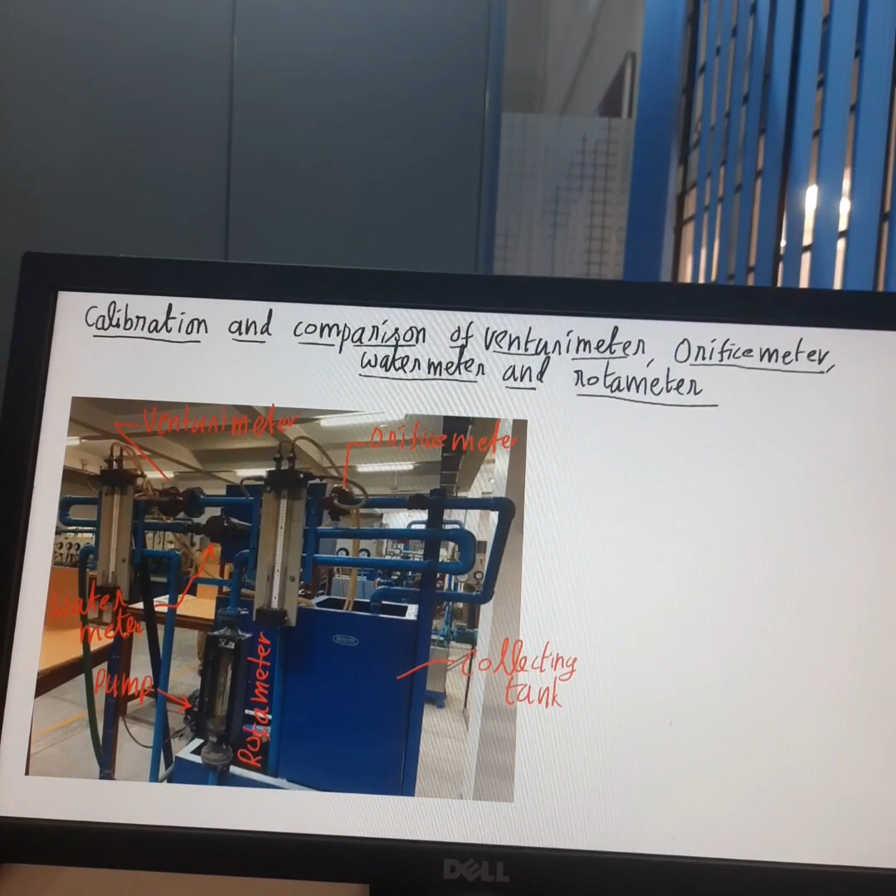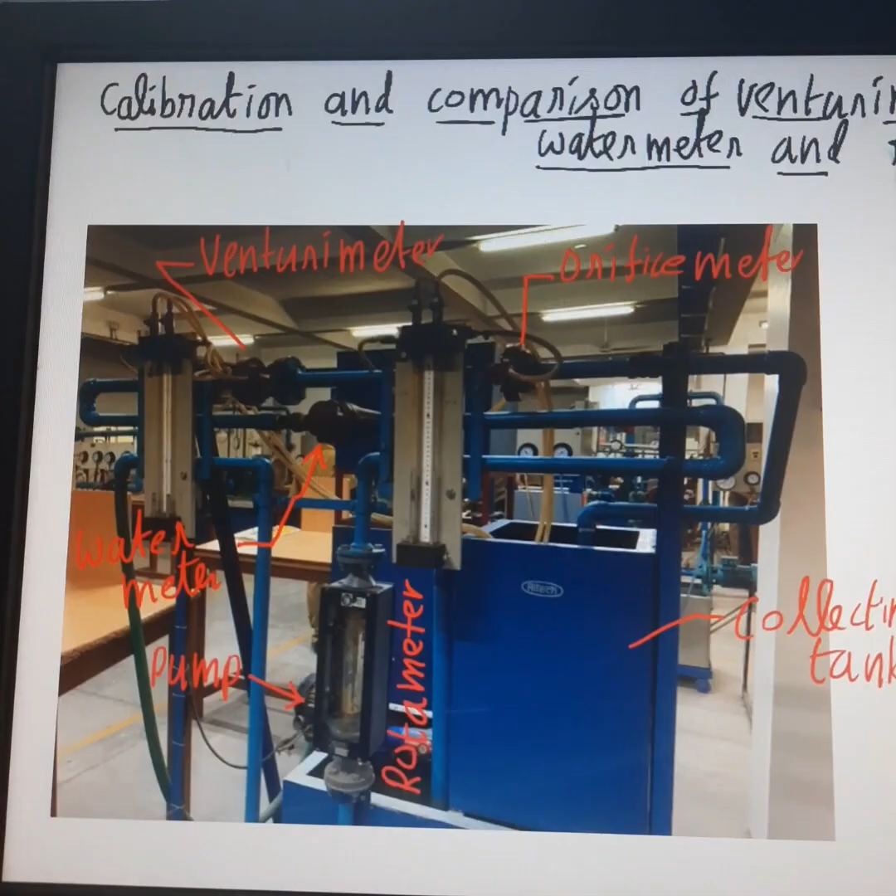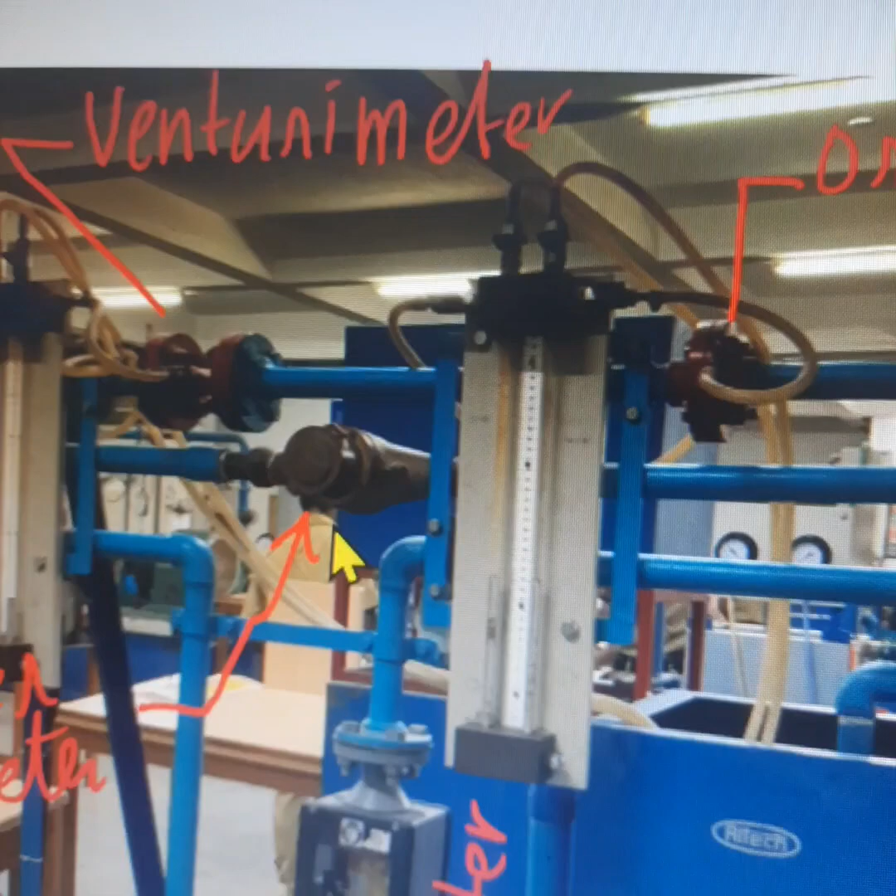This experimental setup contains 4 meters fitted in it: a venturimeter, orifice meter, rotameter, water meter, and a collecting tank is also present here.

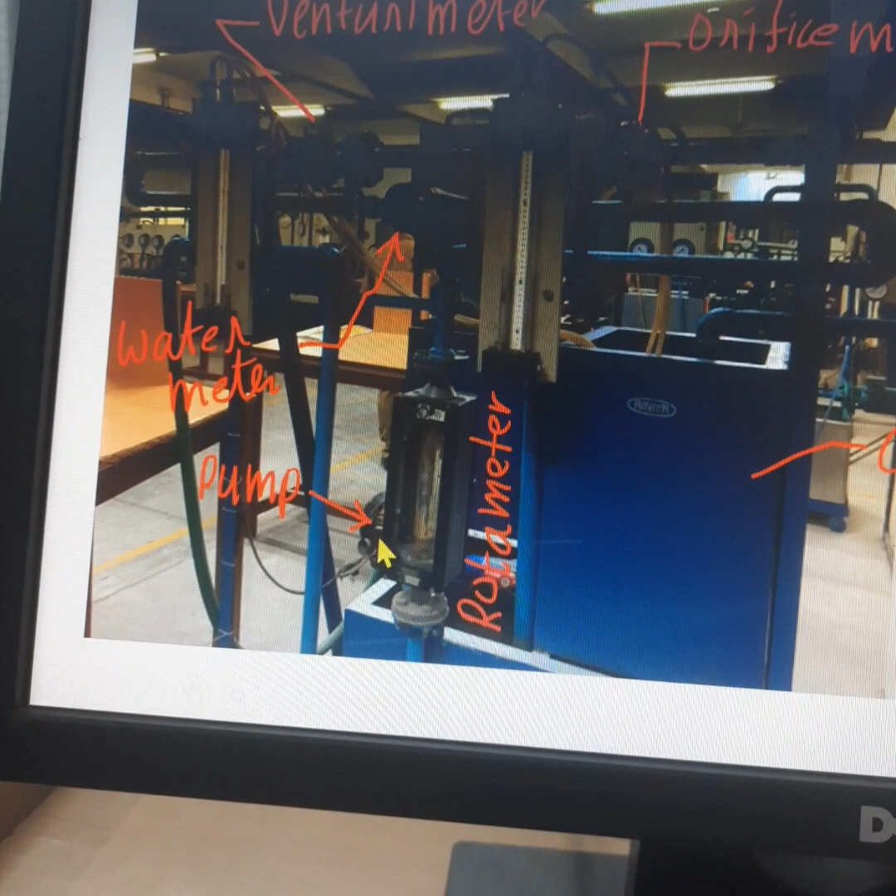There is a pump that supplies water from the sump. The supplied water is flowing through this hose and it flows through all the 4 meters before it is getting collected into the collecting tank.

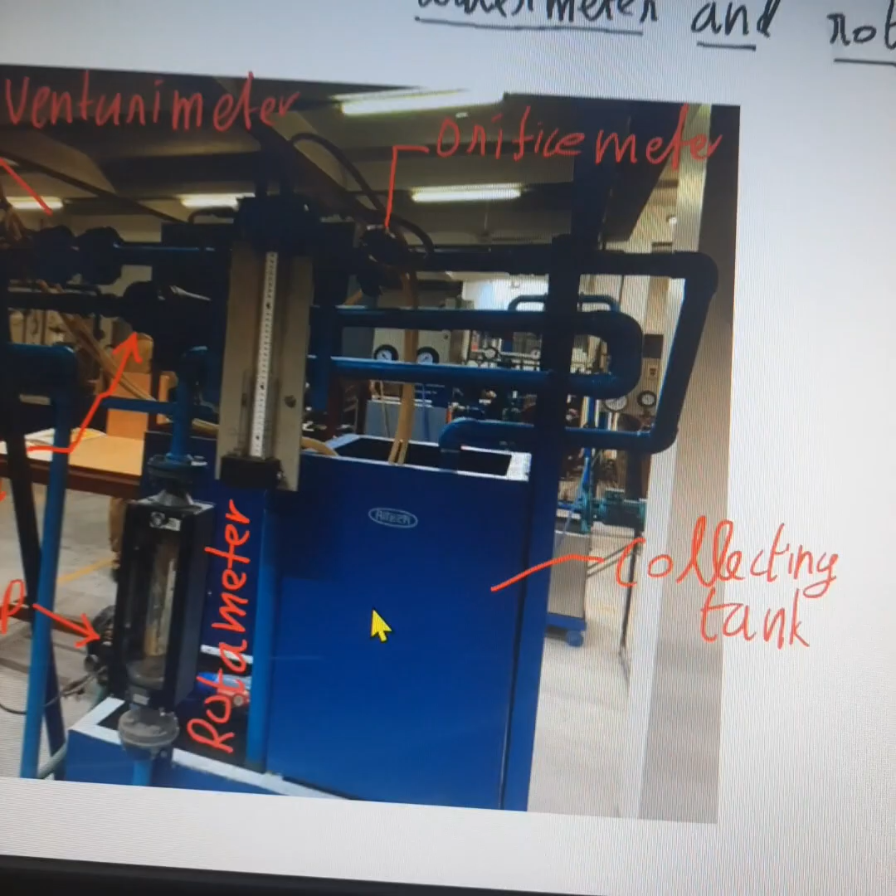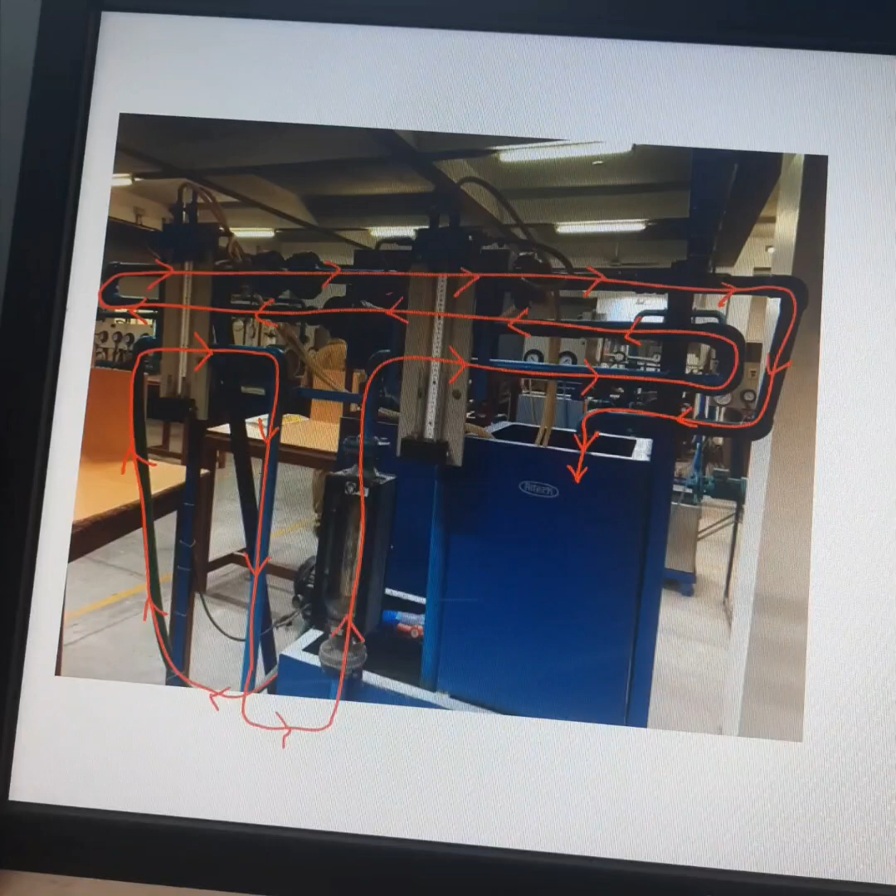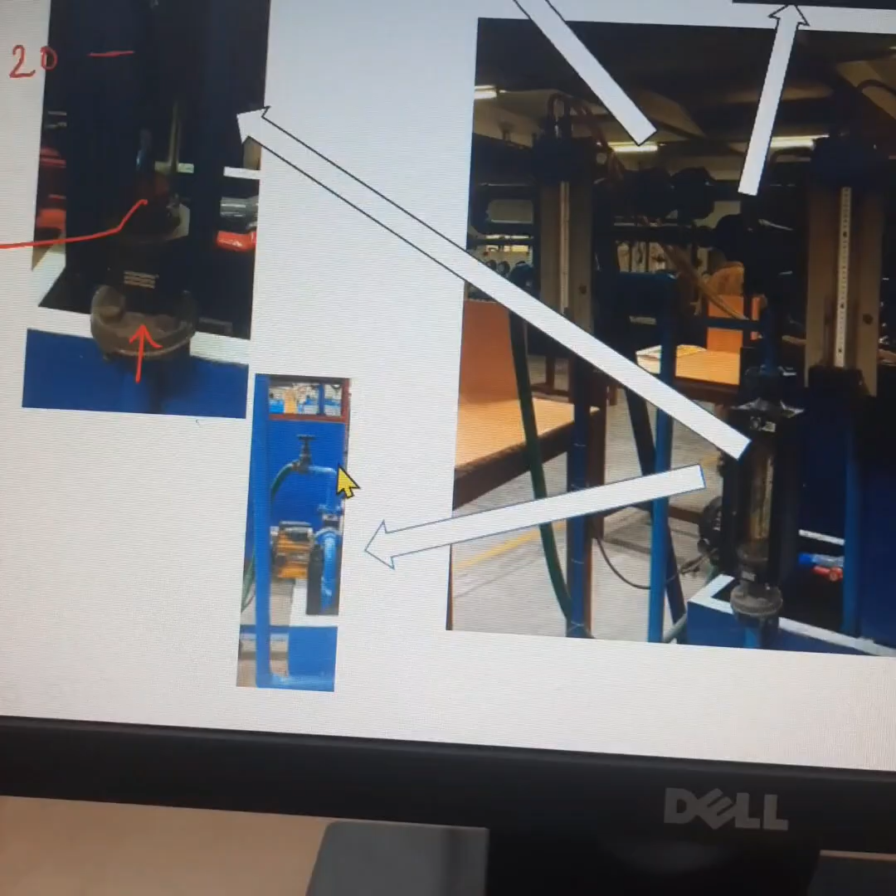This photograph shows the direction of water flowing through all the 4 meters before it is getting collected into the collecting tank. There is a valve fitted at the delivery pipeline of the pump, so we can adjust the valve position to control the discharge of water flowing through these 4 meters. For a given valve position, the rate of flow of water flowing through all the 4 meters will be same.

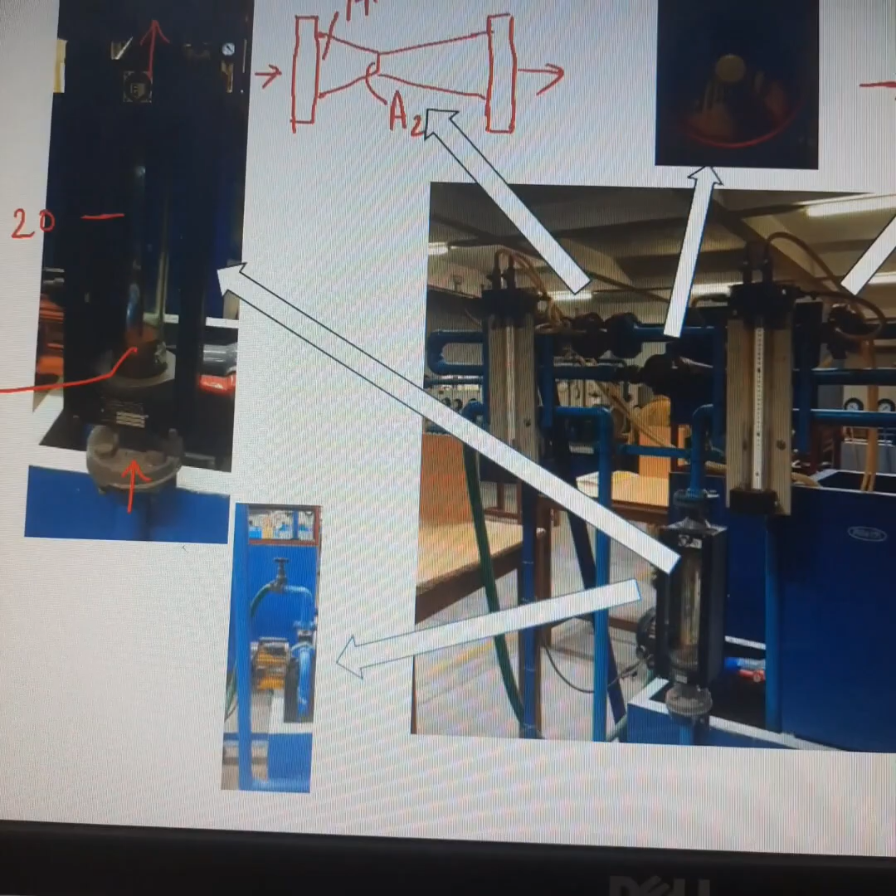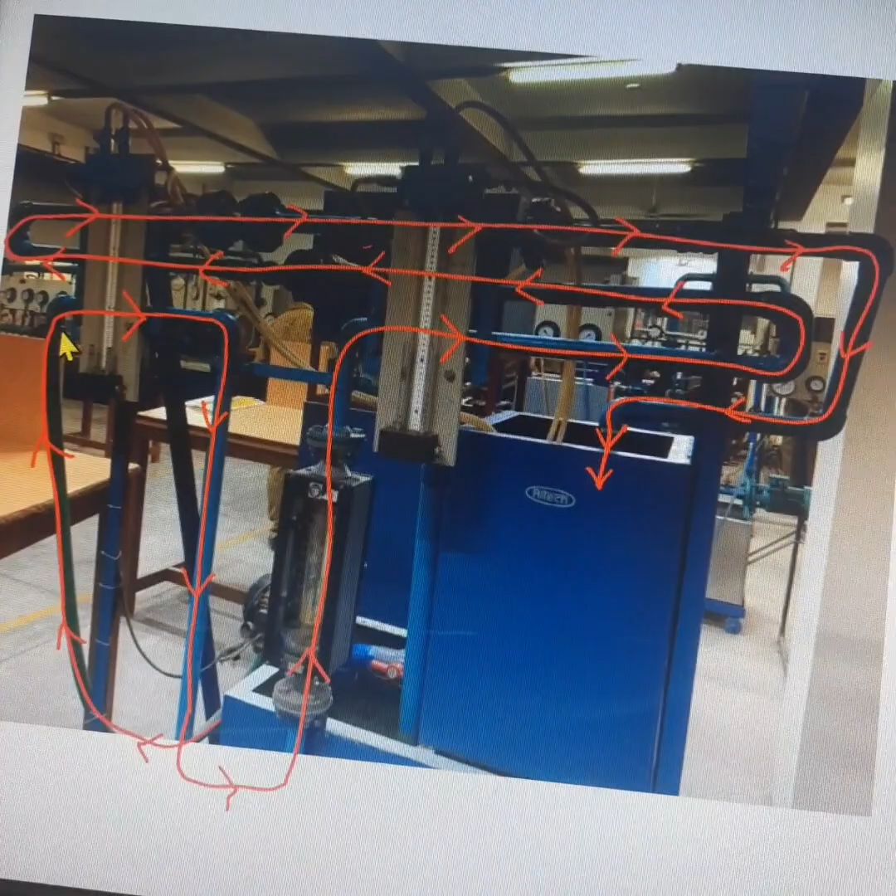Now the water which is delivered to the delivery pipeline is flowing like this, and it flows downwards, first entering through the rotometer. Then the same water is flowing through the water meter. After flowing through the water meter, it goes along this pipeline.

It is flowing through the venturimeter. The venturimeter is connected with a manometer containing mercury. Then the water flows through the orifice meter. This is the orifice meter, and again, the orifice meter is connected with a manometer containing mercury. Then after that, the water is taken to the collecting tank.

I will show the direction of water again: it is flowing like this, entering through the rotometer, flowing through the water meter, flowing through the venturimeter, flowing through the orifice meter, and collected in the collecting tank.

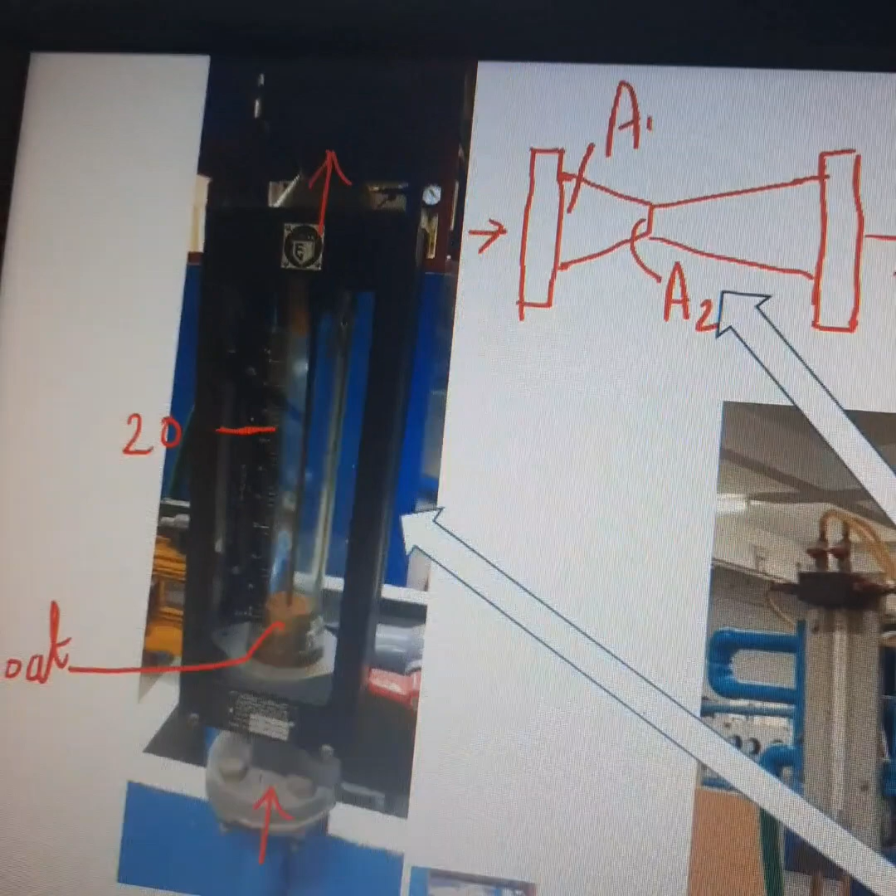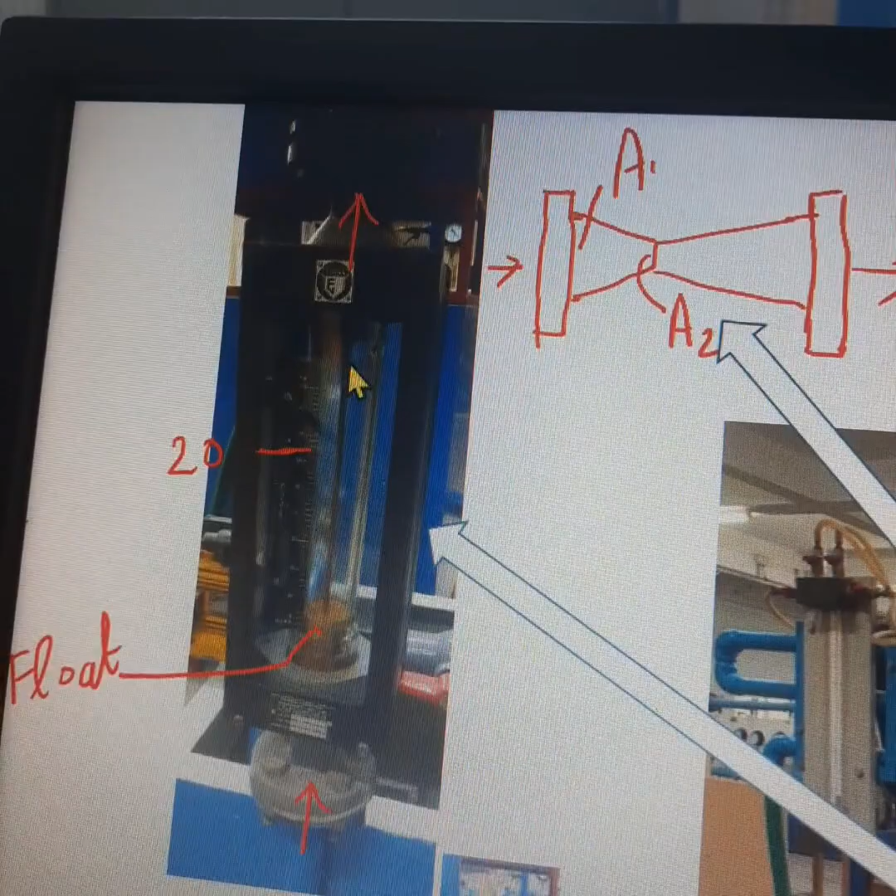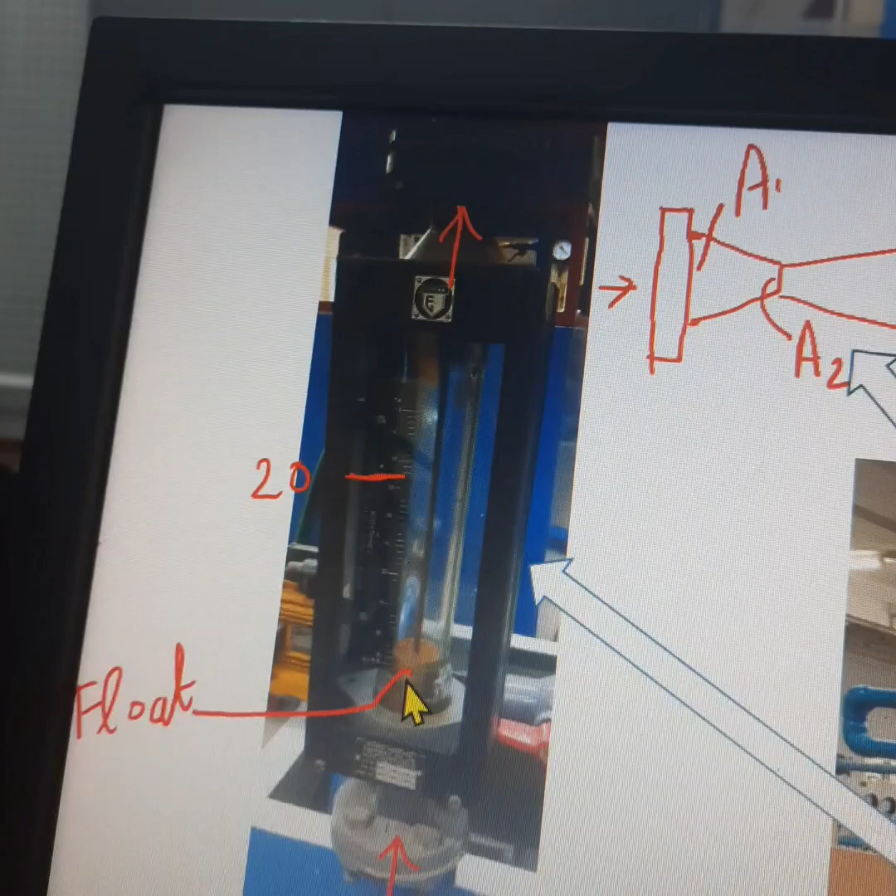The water first enters the rotometer. The rotometer is shown in the enlarged view. A rotometer contains a transparent container, and there is a scale fitted on the outside of the container, and the float which is moving inside gives the reading of the discharge.

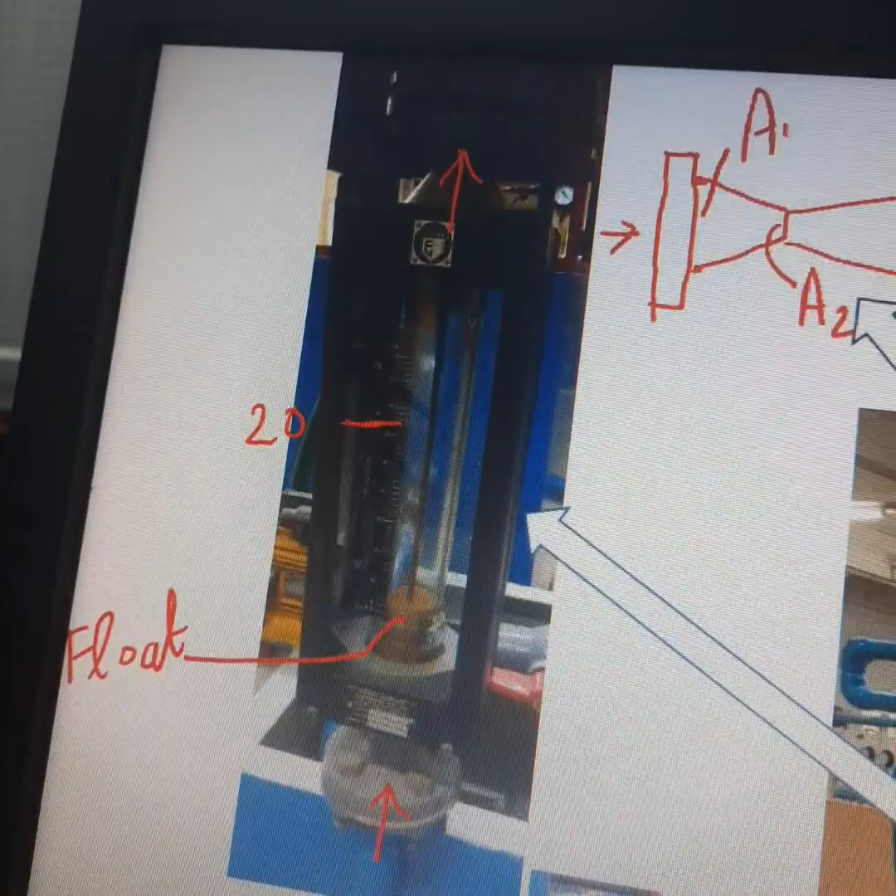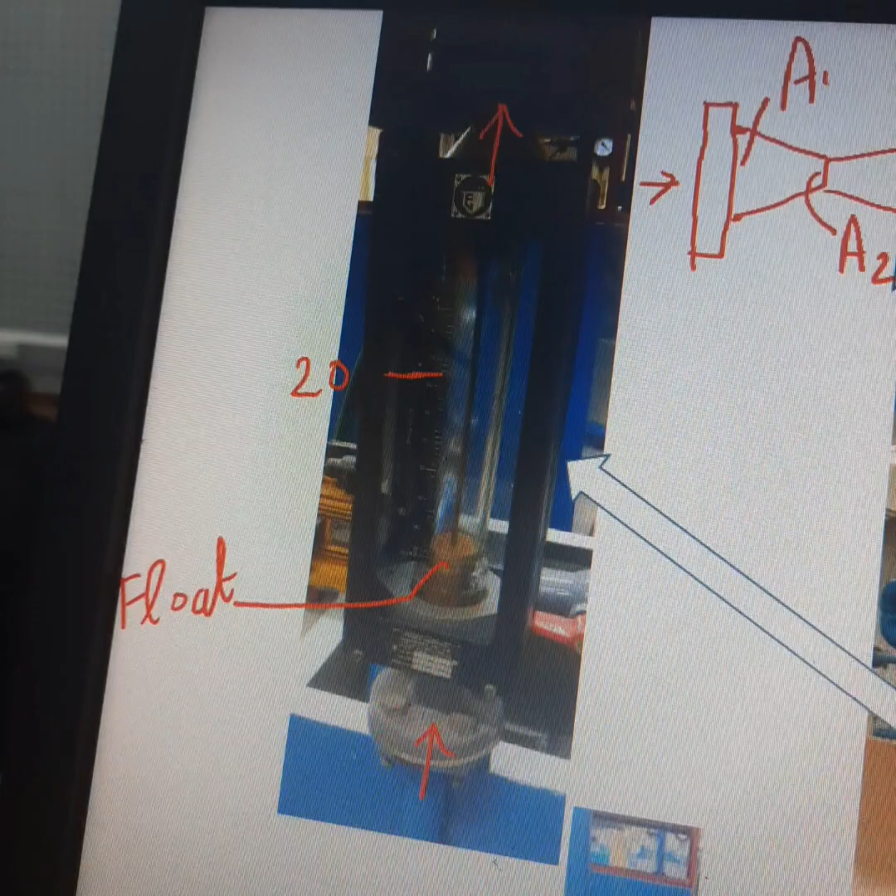Depending upon the discharge of water flowing through the rotometer, the float level stabilizes. When the float level stabilizes against a certain reading, the reading is a direct measurement of discharge in LPM, liters per minute. Suppose the float stabilizes against a reading of 20, it means that the discharge is 20 liters per minute. So this is how you make use of the rotometer for the measurement of discharge of water.

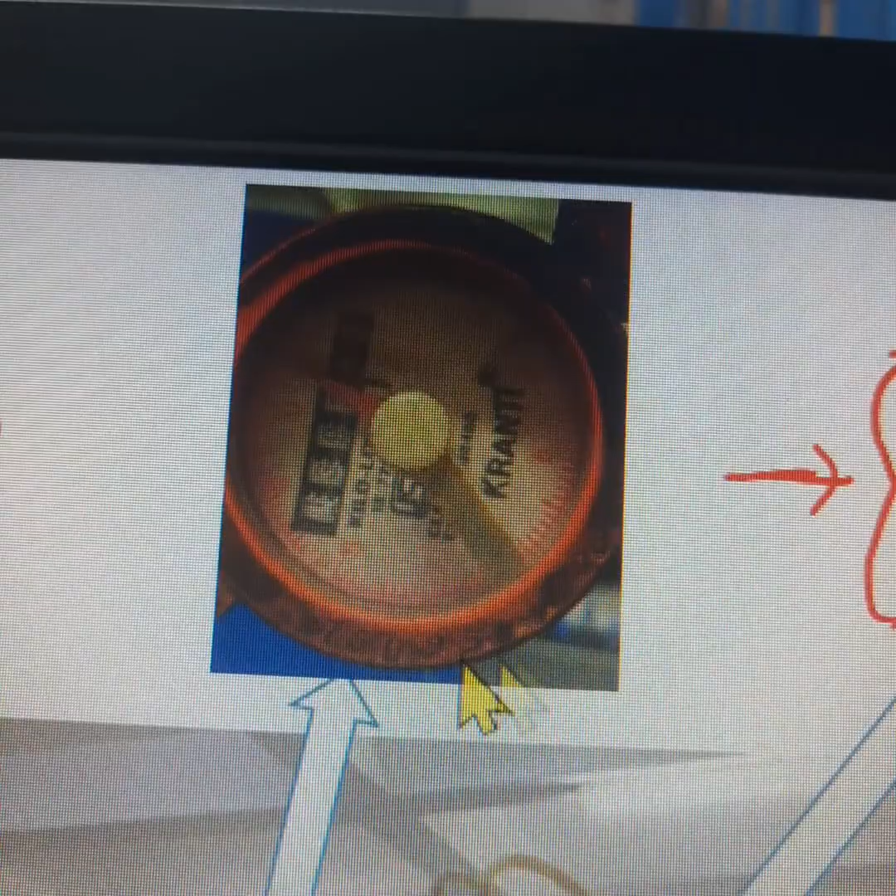Then the water flows through the water meter, which is shown here. In the water meter, there is a needle. When 10 liters of water flows through the water meter, the needle completes one full revolution. You have to measure the time taken for 10 liters of water to pass through the water meter. If you know these two values, we can find the discharge.

So volume of water is 10 liters, and the time taken for 10 liters of water to pass through is TW. We can find the discharge of water.

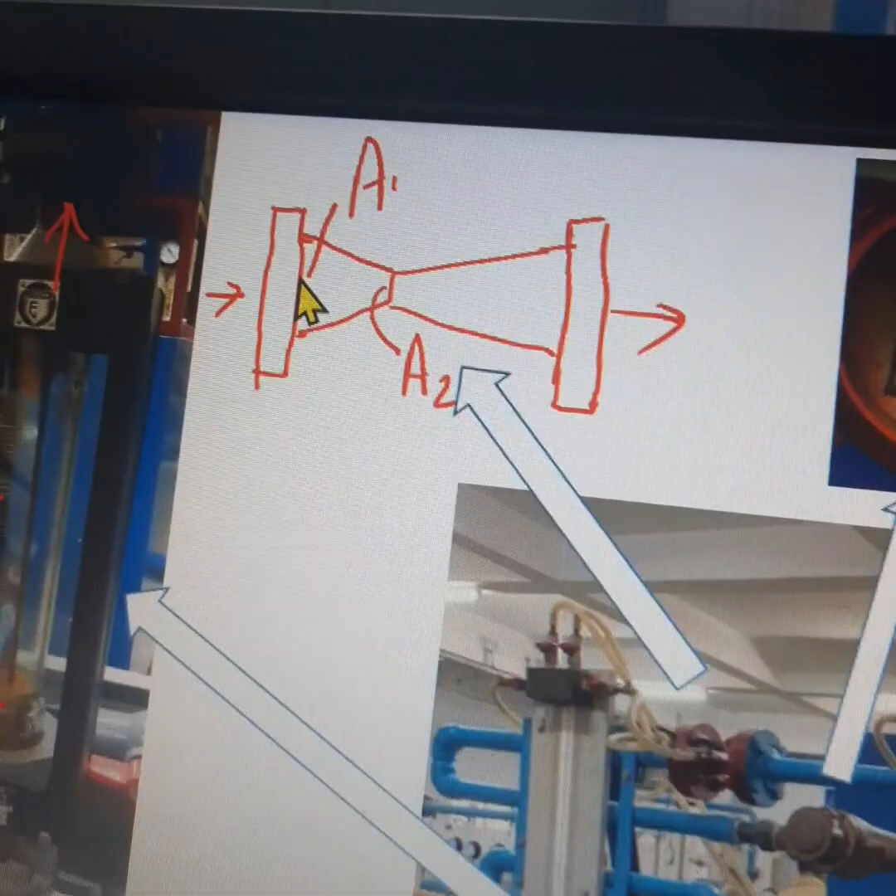Then the water flows through the venturimeter. The venturimeter has got two cross sections, the main section and the throat section. The area of the main section is A1 and the area of the throat section is A2.

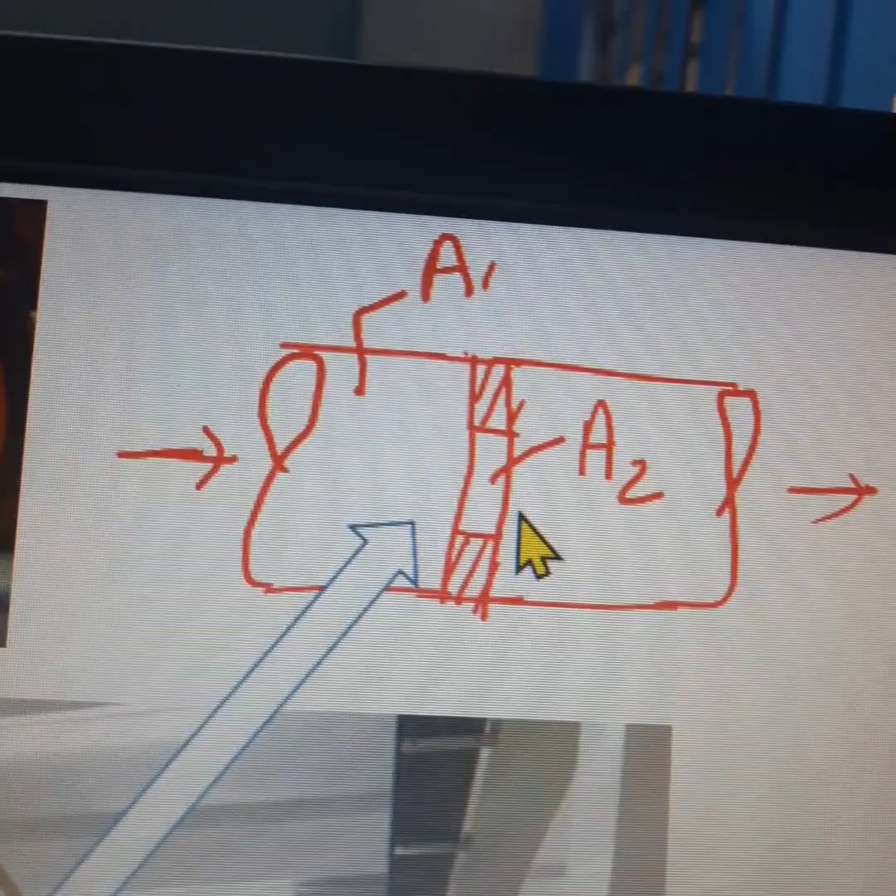Then the water flows through the orifice meter. The orifice meter has an orifice opening, whose area is A2, and the pipe area is A1. After passing through all the 4 meters, the water is getting collected in the collecting tank to find the actual discharge.

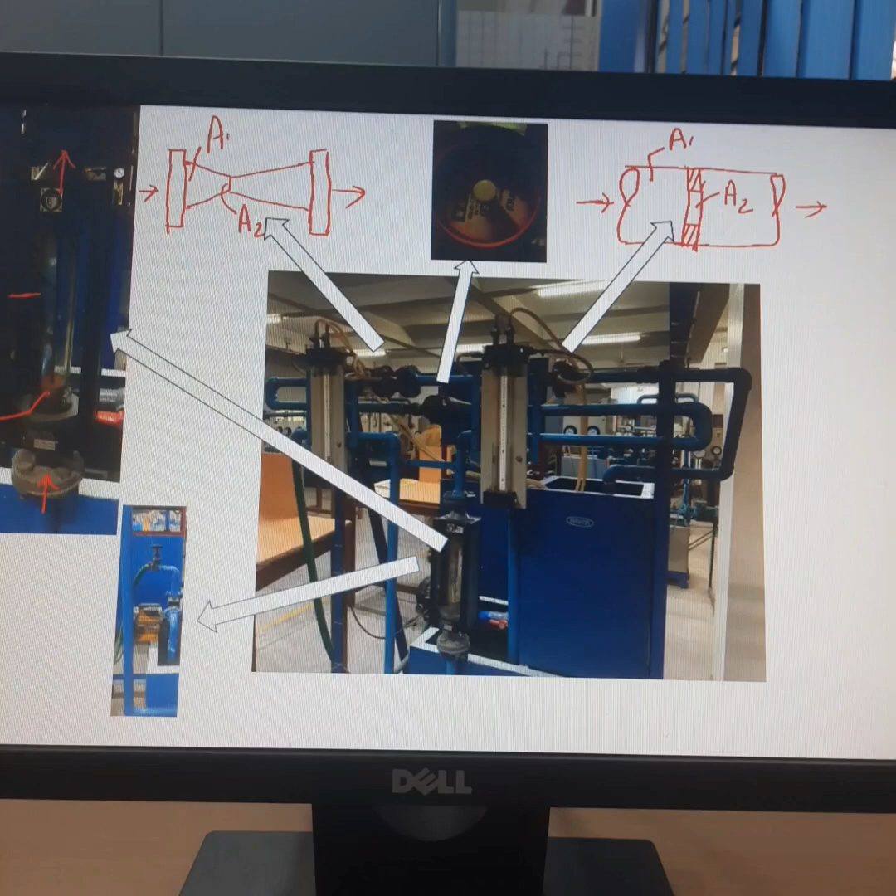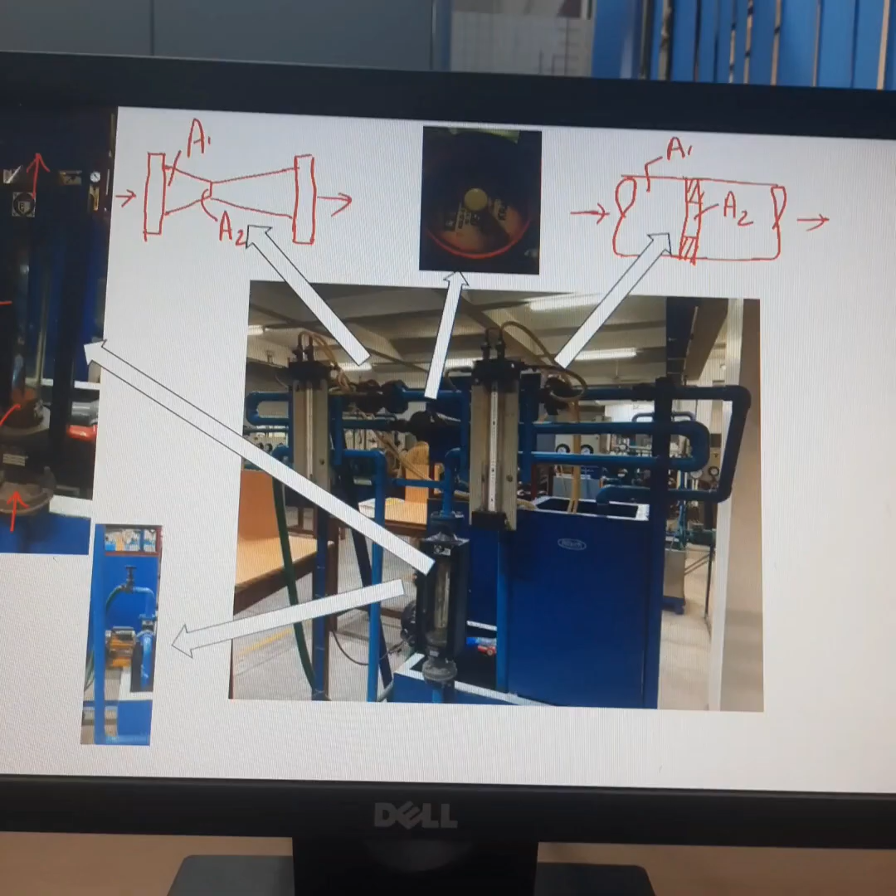The same water is passing through all 4 meters when the position of the valve is not changed. But the reading shown by all 4 meters will not be the same because of the accuracy difference between them. A venturimeter may be most accurate, and its reading may be very close to the actual reading. So we have to compare the reading shown by each of these 4 meters with the actual reading.

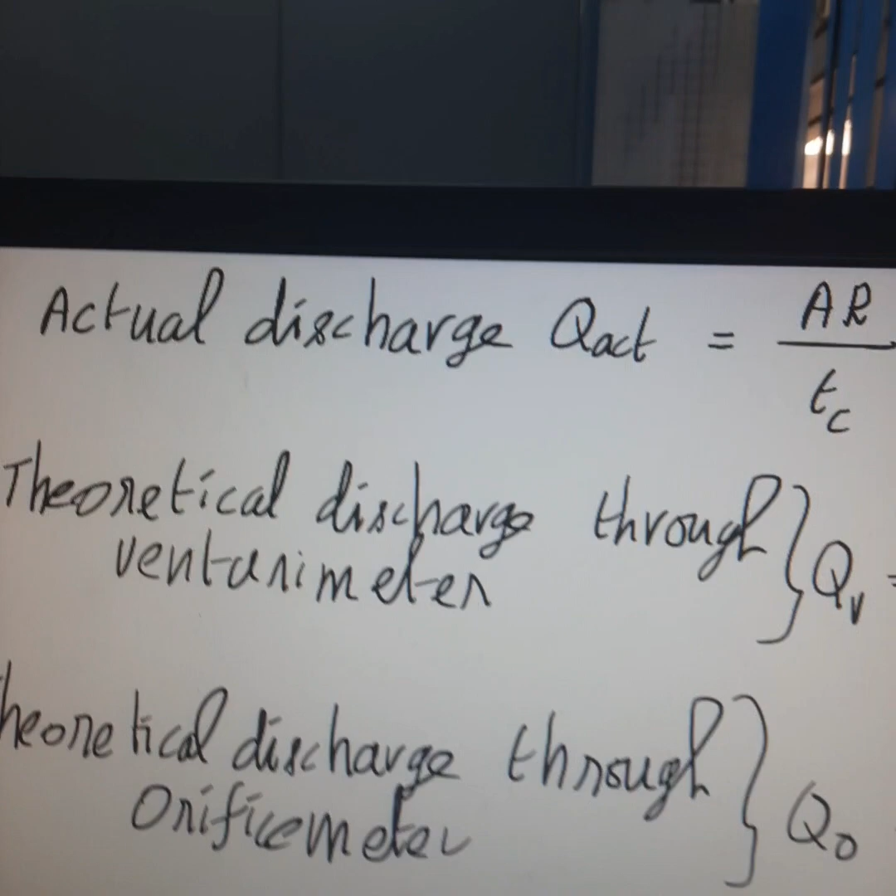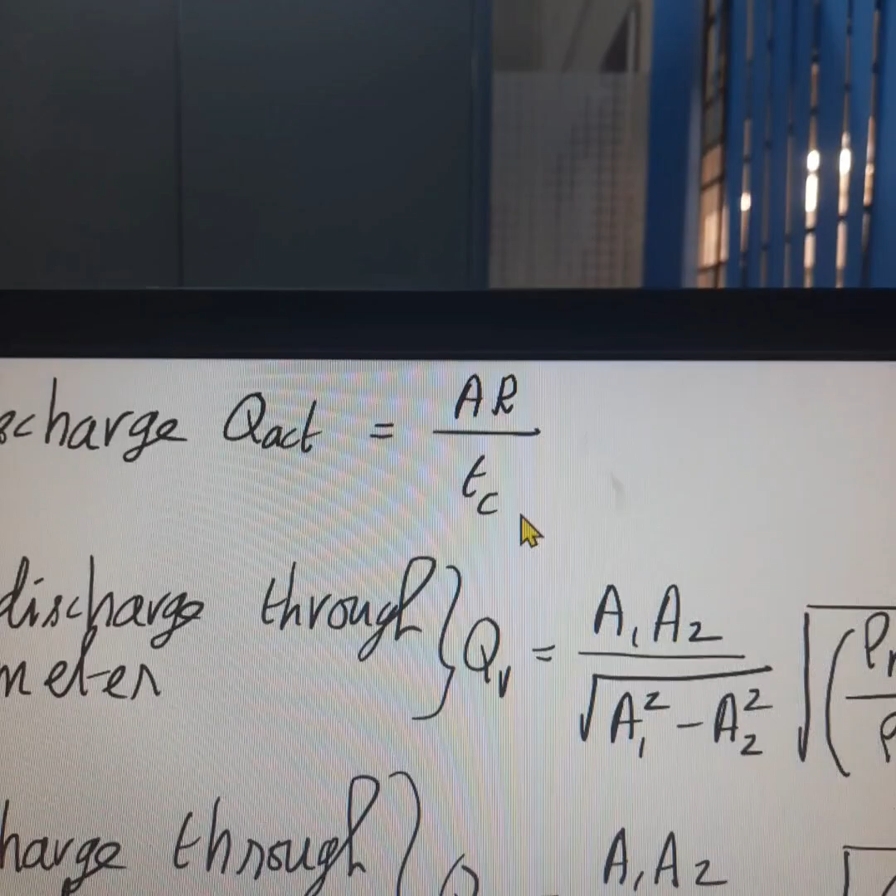The actual discharge can be measured using the collecting tank. We have to measure the time taken for a certain rise of water level in the collecting tank, and we can measure the actual discharge using the formula A times R divided by TC, where TC is the time taken for a one centimeter rise of water level in the collecting tank.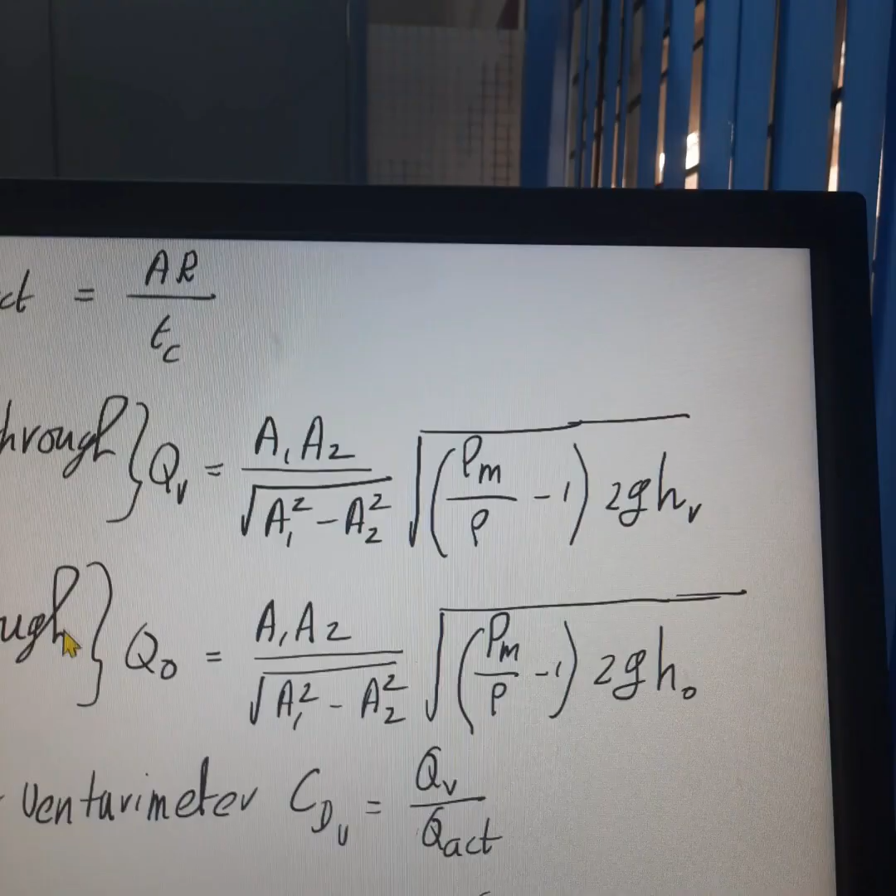The theoretical discharge of the venturimeter can be found using this formula: QV equals A1 A2 divided by the square root of A1 squared minus A2 squared, into the square root of rho m by rho minus 1, into 2G HV.

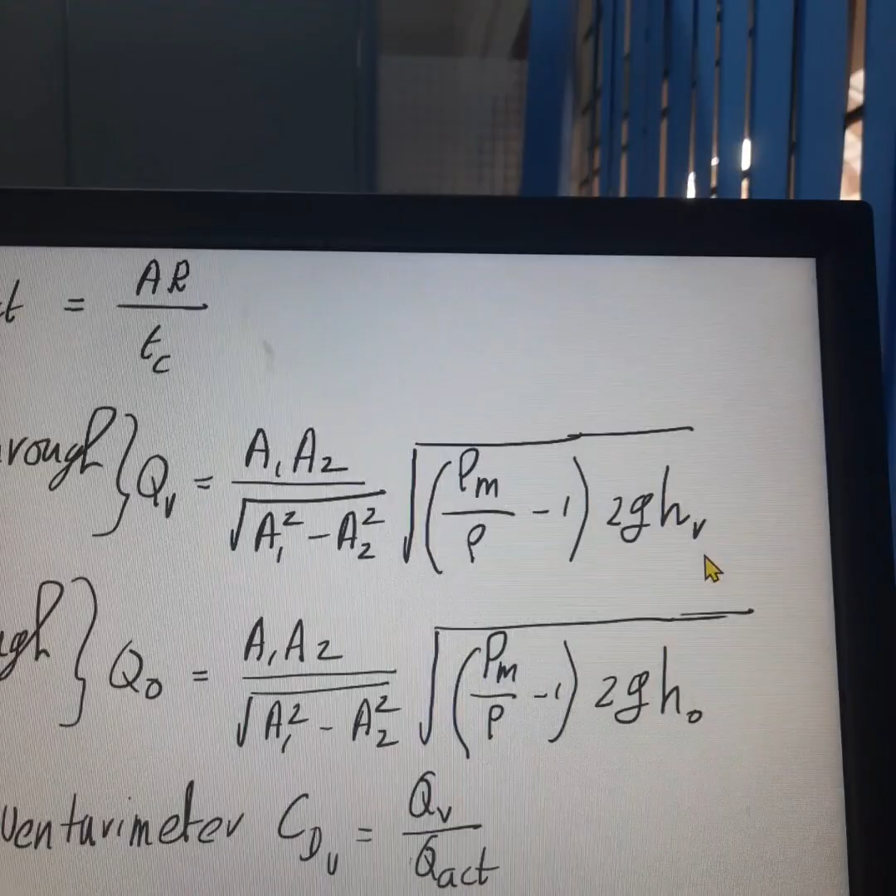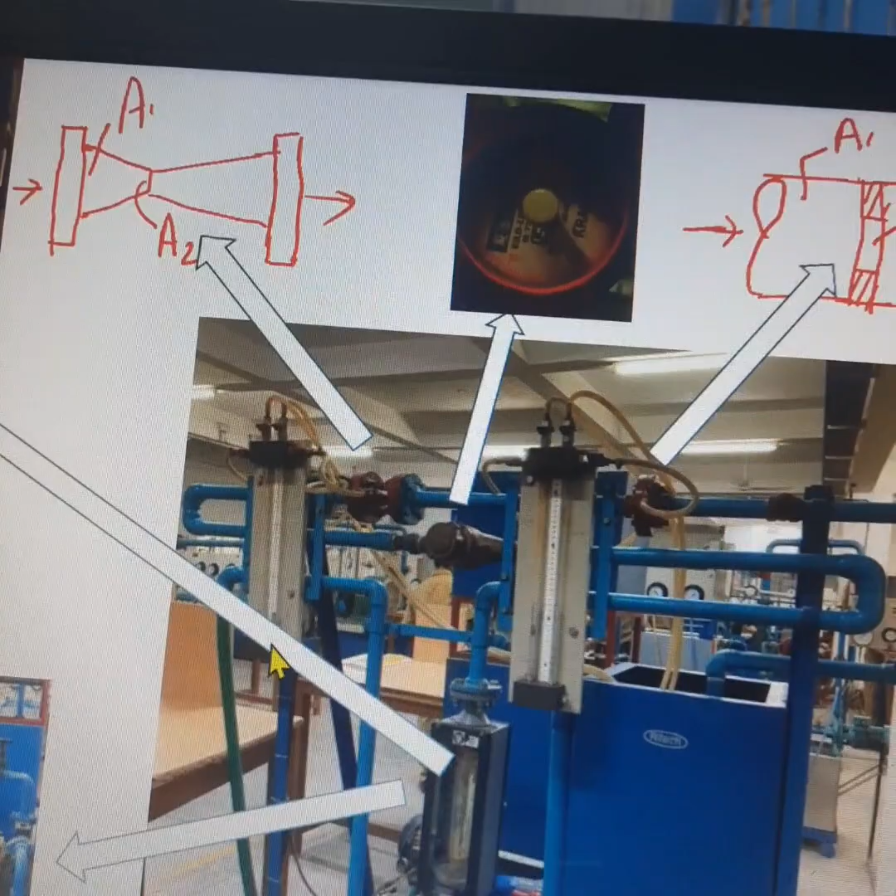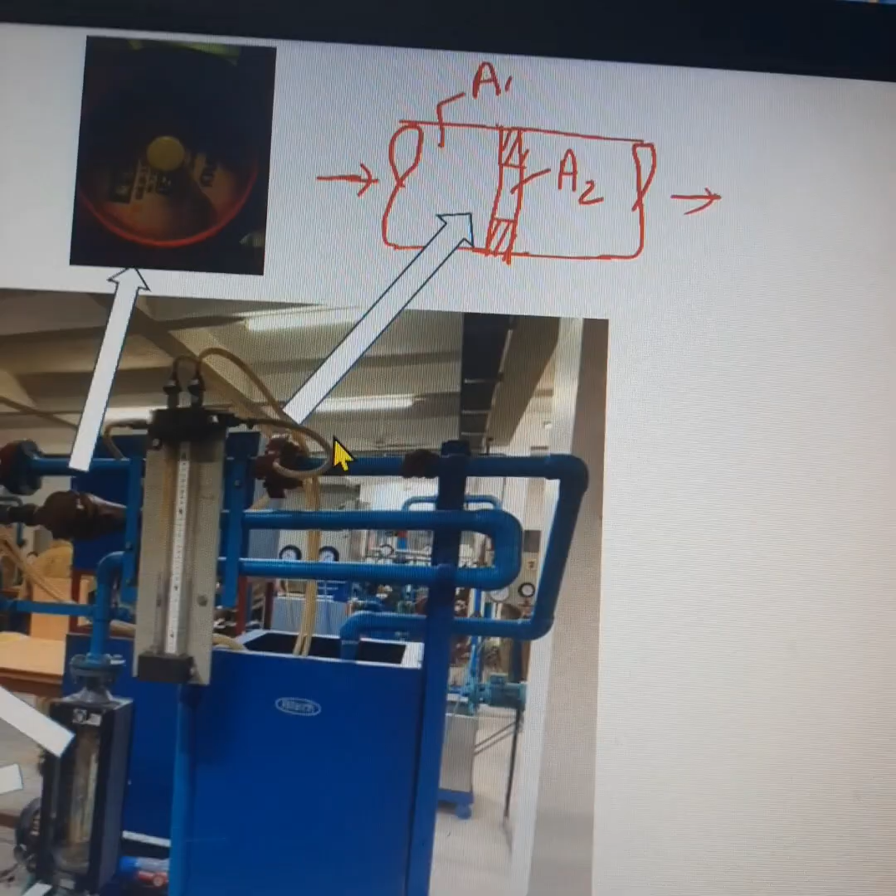Here HV is the level difference of mercury in the manometer which is connected with the venturimeter. As you can see, there is a manometer connected with the venturimeter, filled with mercury. We have to find the level difference of mercury, called HV. Similarly, we have to find the level difference of mercury in the manometer fitted with the orifice meter, which we call HO.

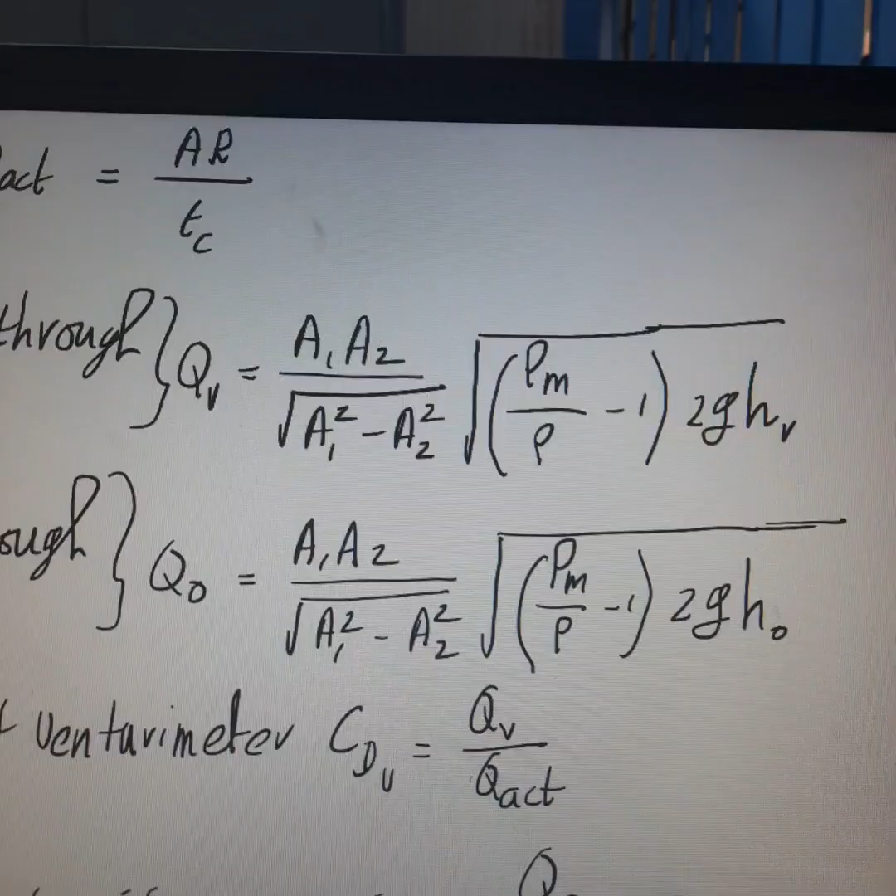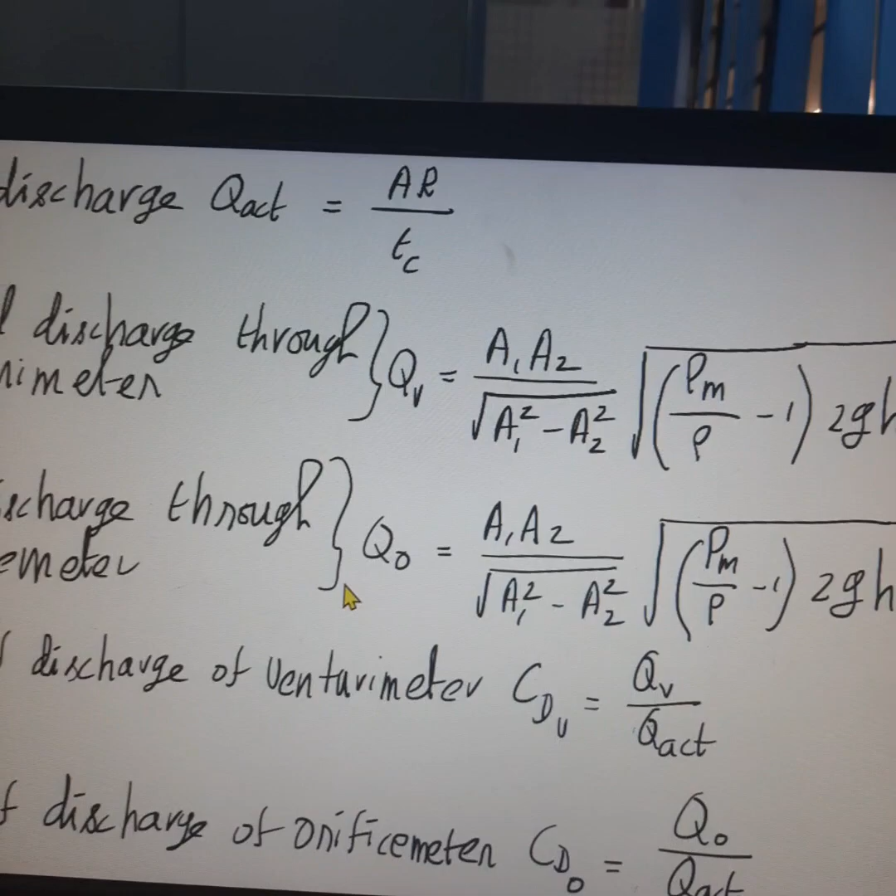This formula gives the theoretical discharge through the venturimeter, where rho m is the density of mercury and rho is the density of water, and HV is the reading shown by the manometer. Similarly, the theoretical discharge through the orifice meter can be found using the same formula, taking the reading shown by the manometer attached with the orifice meter, HO.

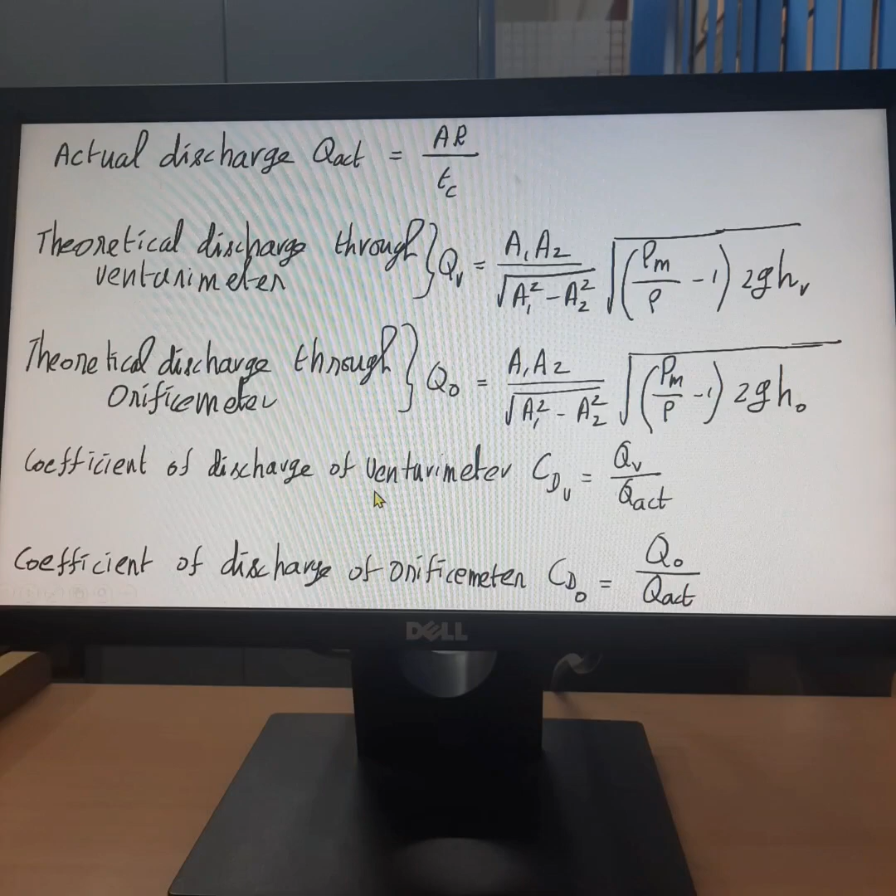Once you know these two theoretical discharges through the venturimeter and the orifice meter, we can find the coefficient of discharge of the venturimeter using this formula: CDV equals QV by Q actual. Similarly, the CD value of the orifice meter can be found using this formula, QO by Q actual.

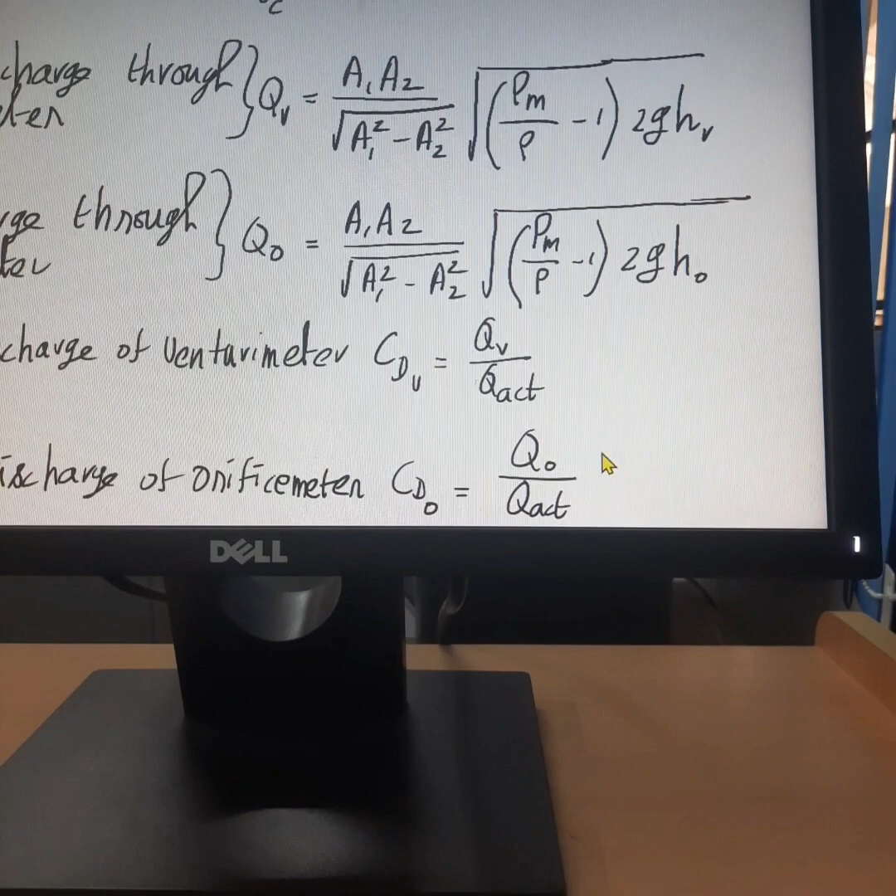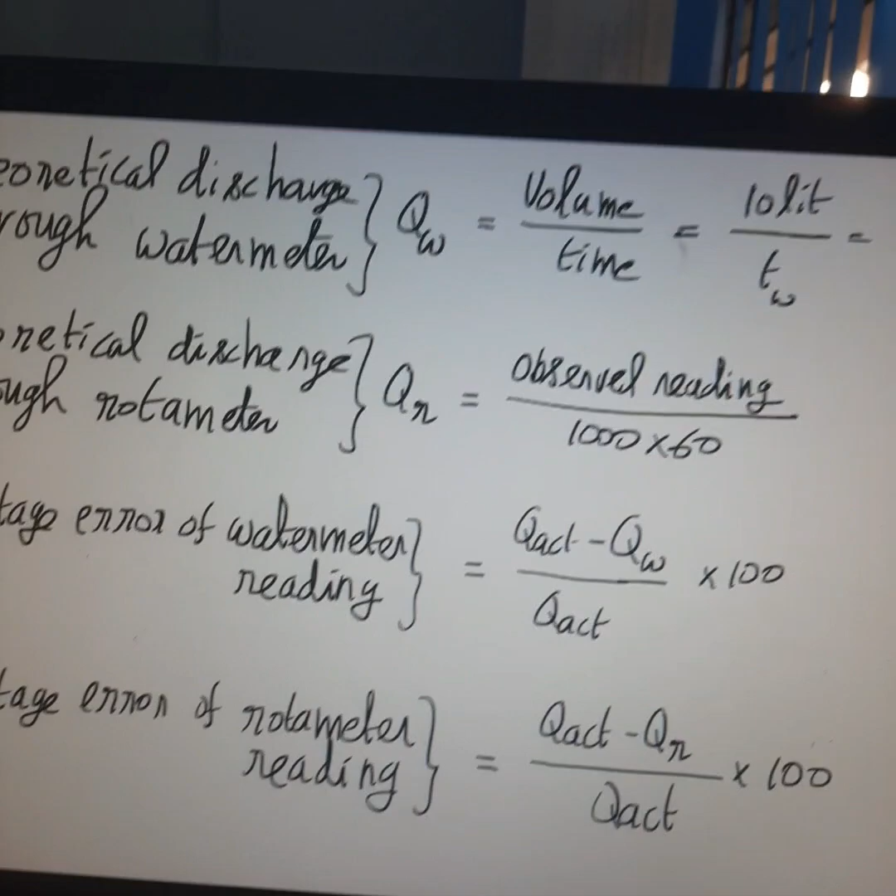Now, for the water meter and rotameter, we don't find a CD value. We compare the reading shown by these 2 meters with the actual reading, and we find the percentage error.

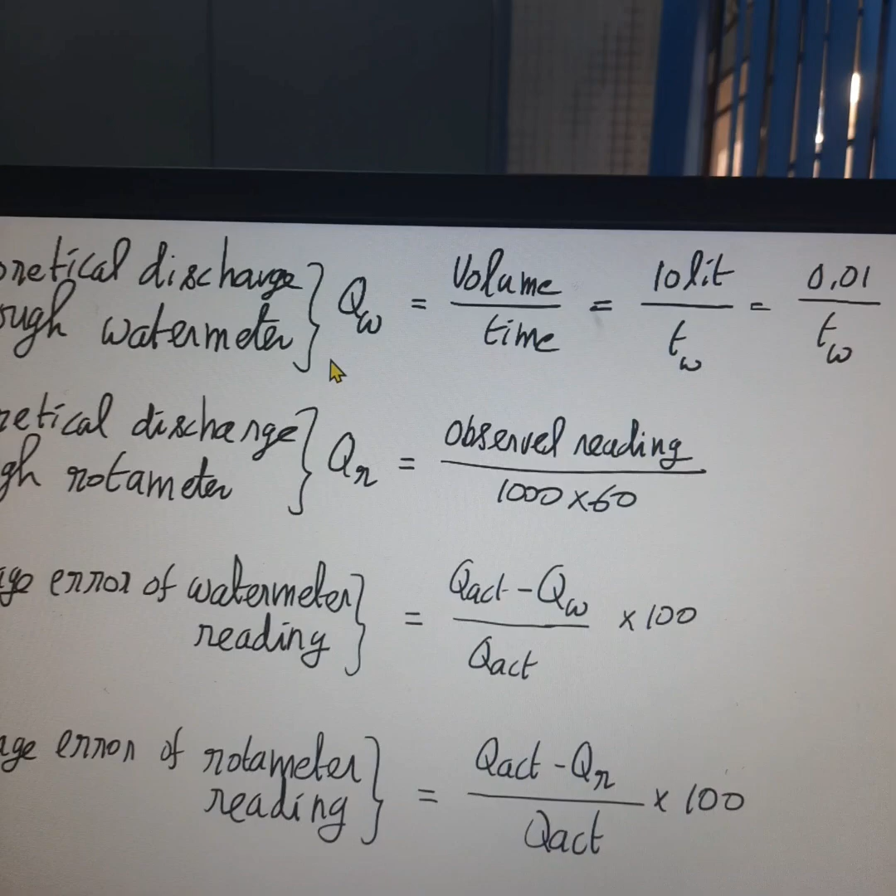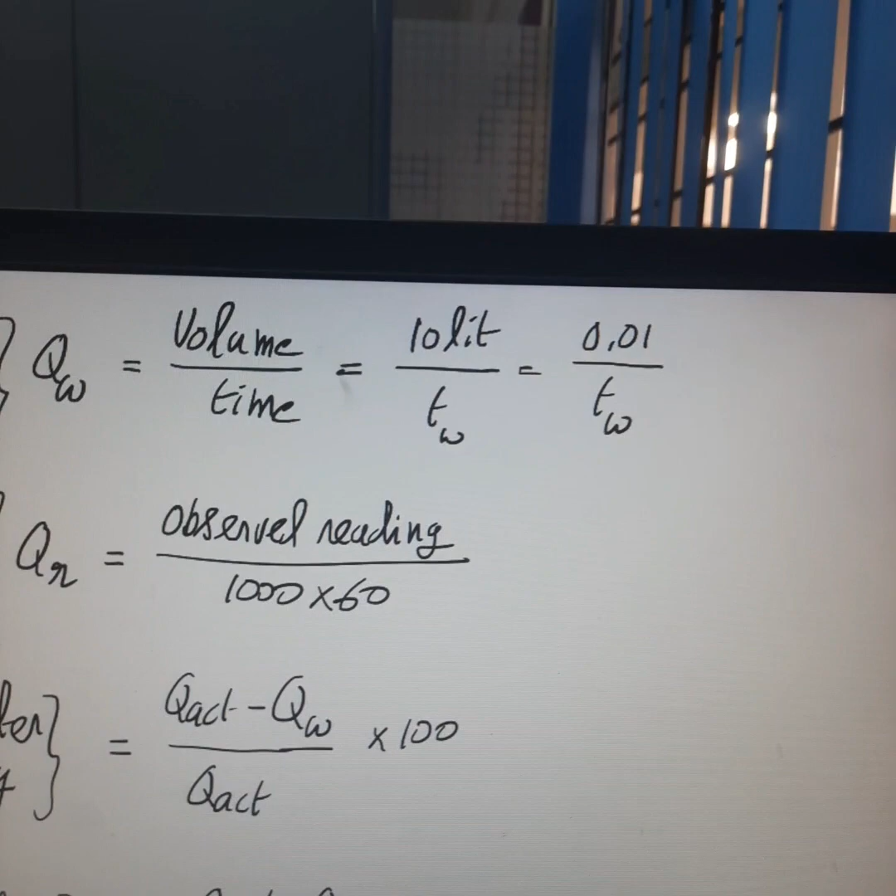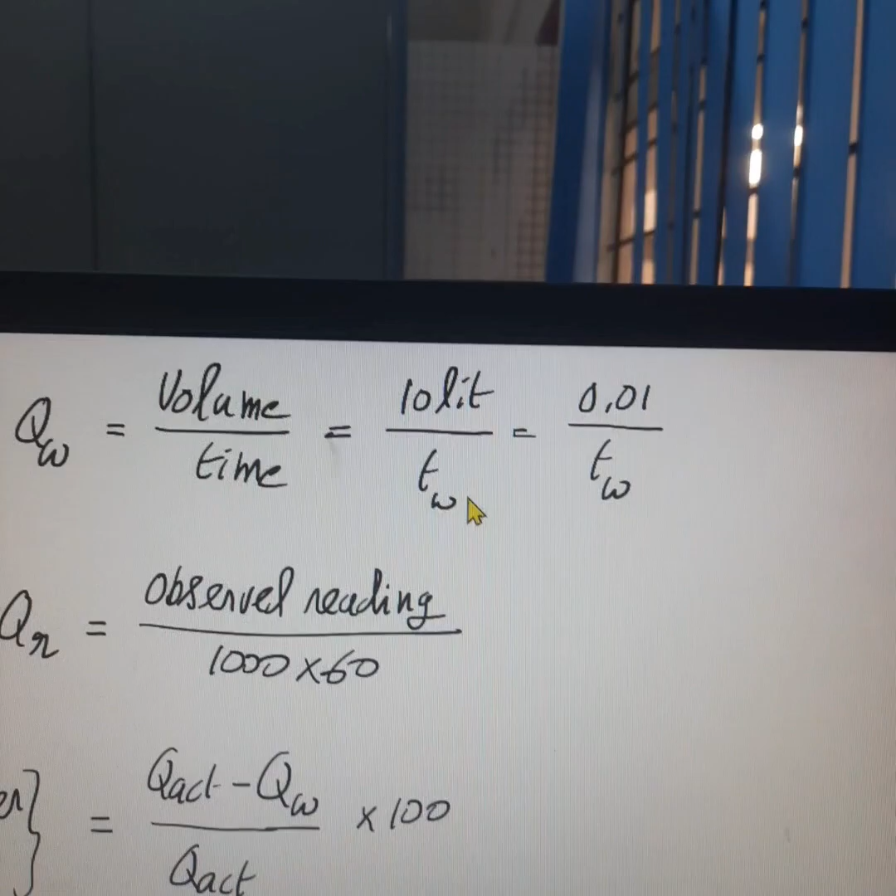The theoretical discharge through the water meter is given by the volume of water collected divided by time. For the water meter, we note the time taken for the needle to complete one revolution, meaning 10 liters of water has passed through the water meter, and the time taken for this 10 liters of water is TW. Volume by time gives the discharge, so the volume of 10 liters is converted to meter cube, 0.01.

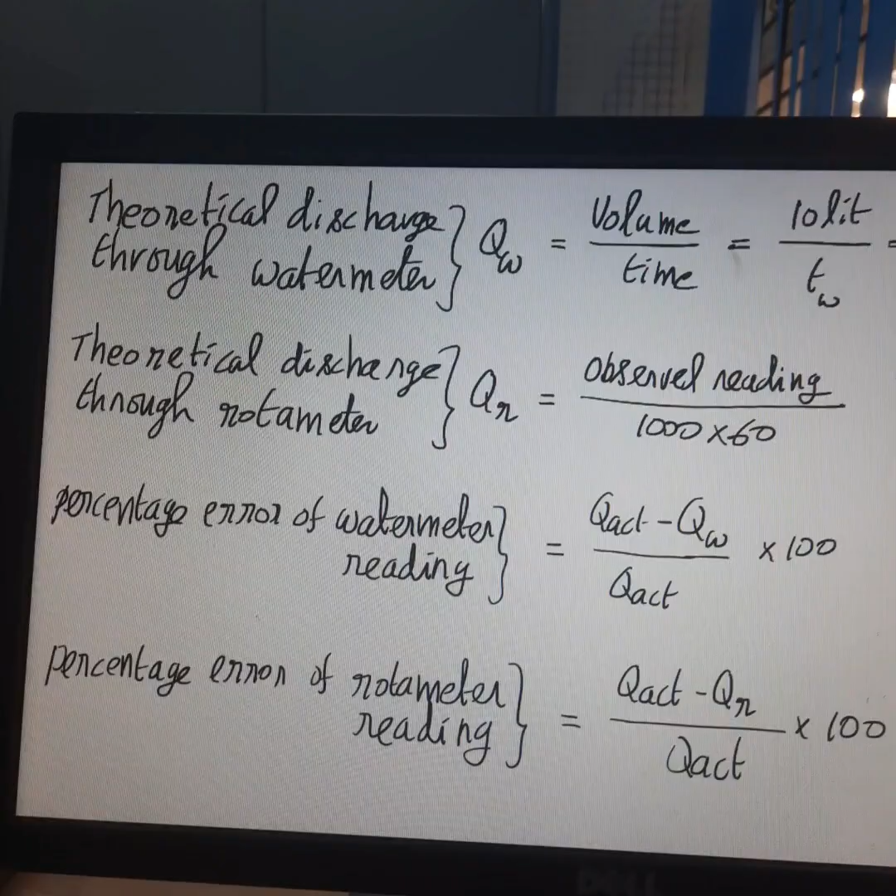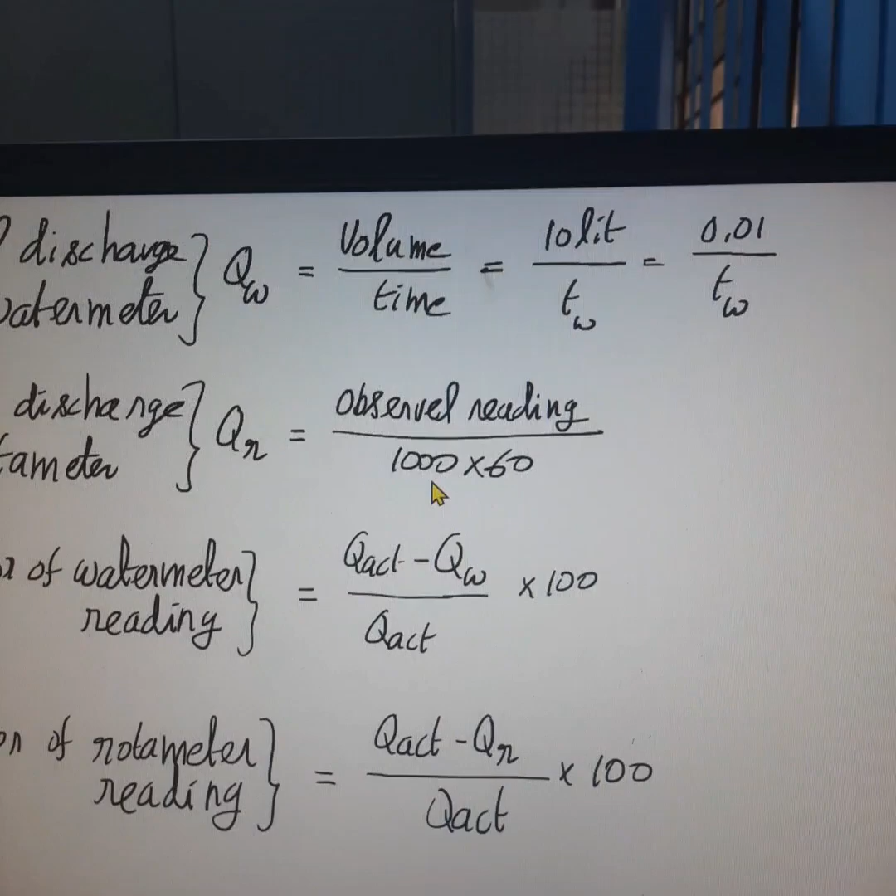The theoretical discharge through the rotameter can be directly found out. Since the reading shown by the rotameter is in LPM, liters per minute, we have to divide by 1000 and 60 to convert into meter cube per second.

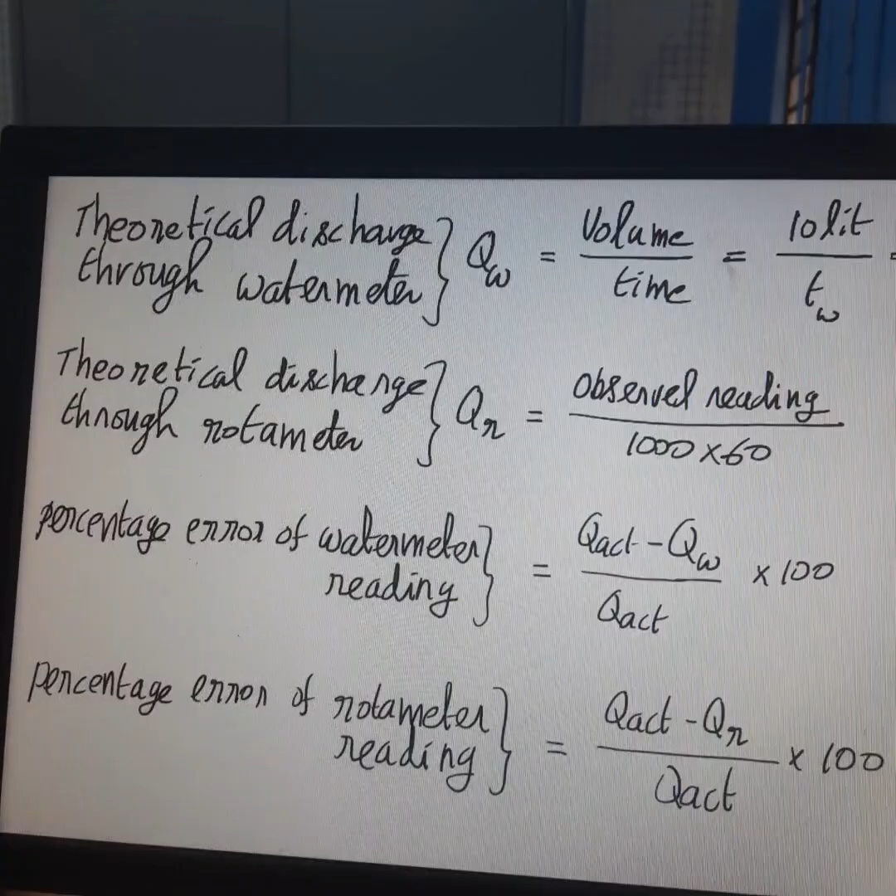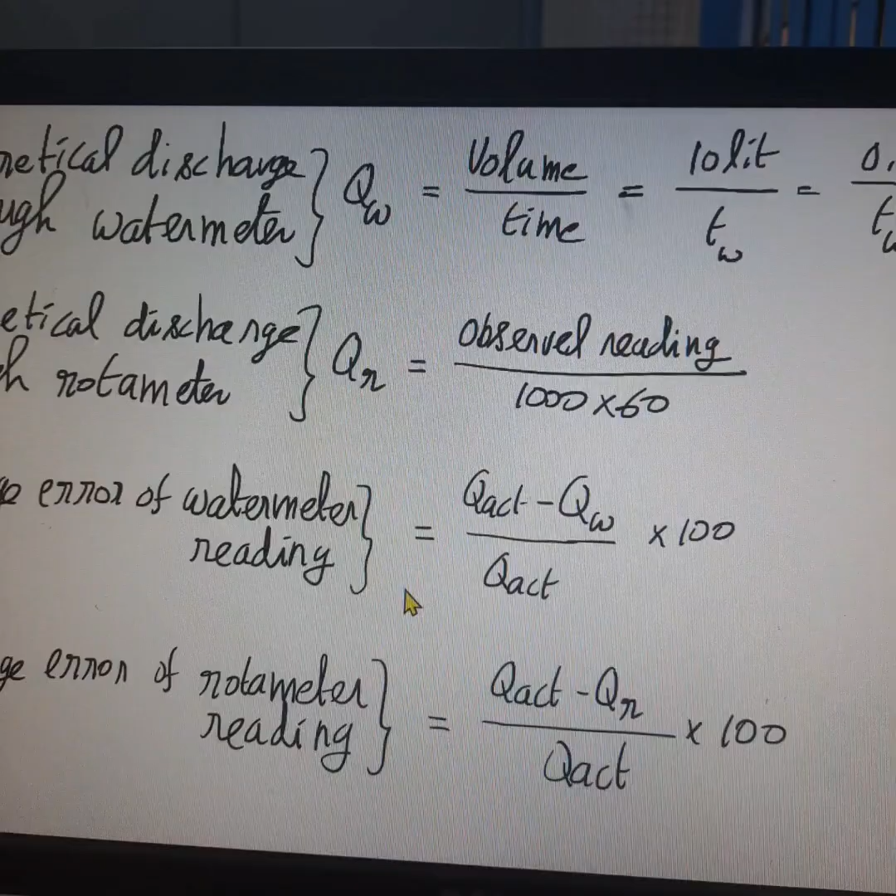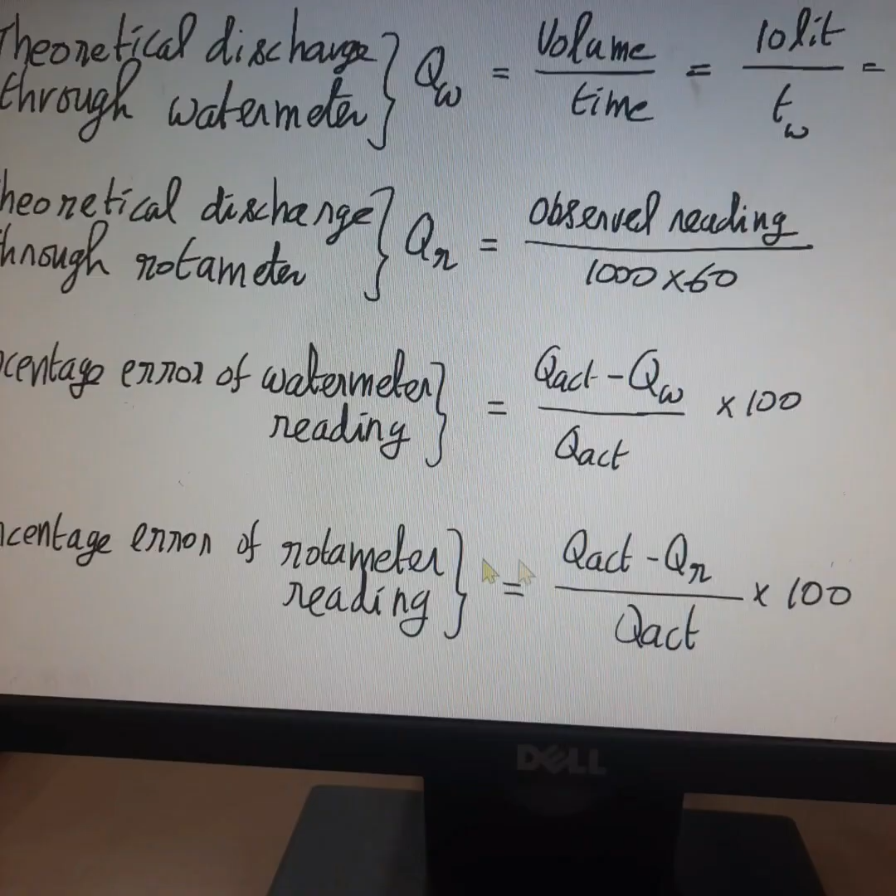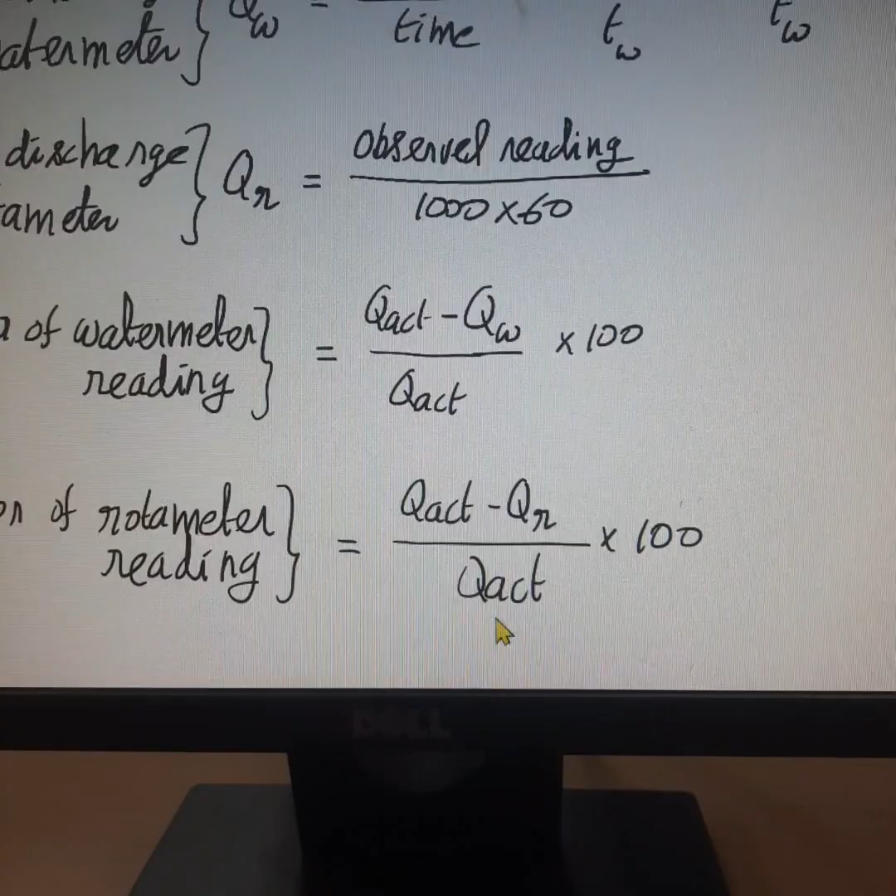Once we know the theoretical discharge through the water meter and the rotameter, we can compare this with the actual discharge to find the percentage error in the water meter and rotameter readings. The formula for the percentage error in the water meter reading is Q actual minus QW divided by Q actual into 100, where QW is the reading shown by the water meter. Similarly, the percentage error in the rotameter reading is Q actual minus QR divided by Q actual into 100, where QR is the theoretical discharge shown by the rotameter.

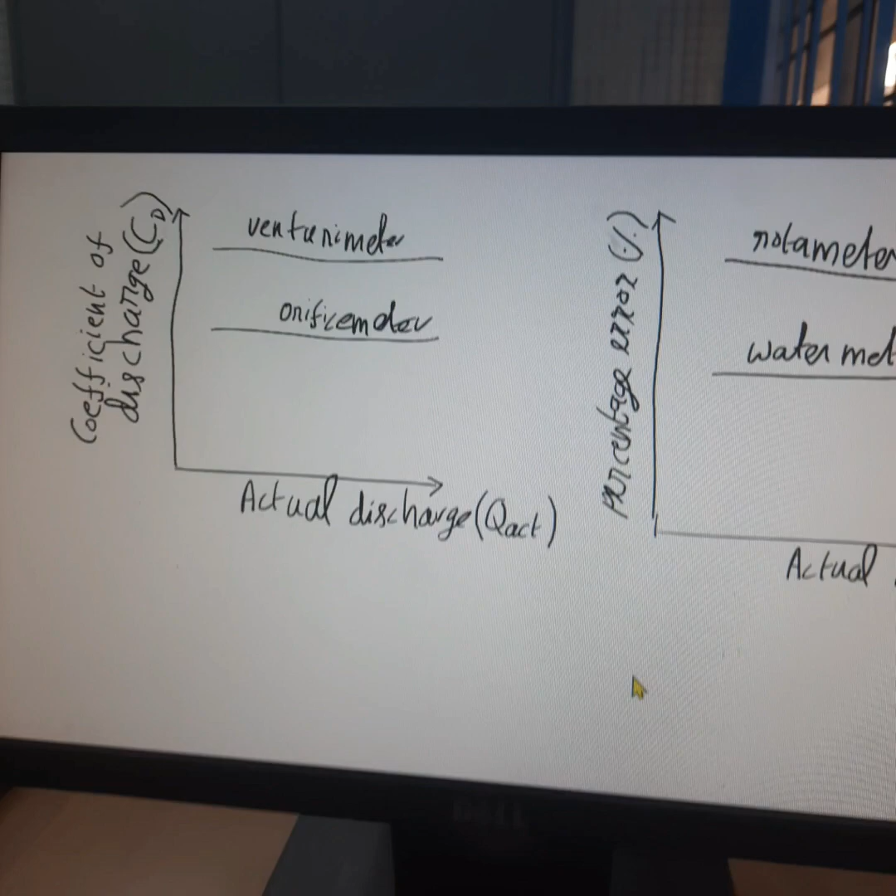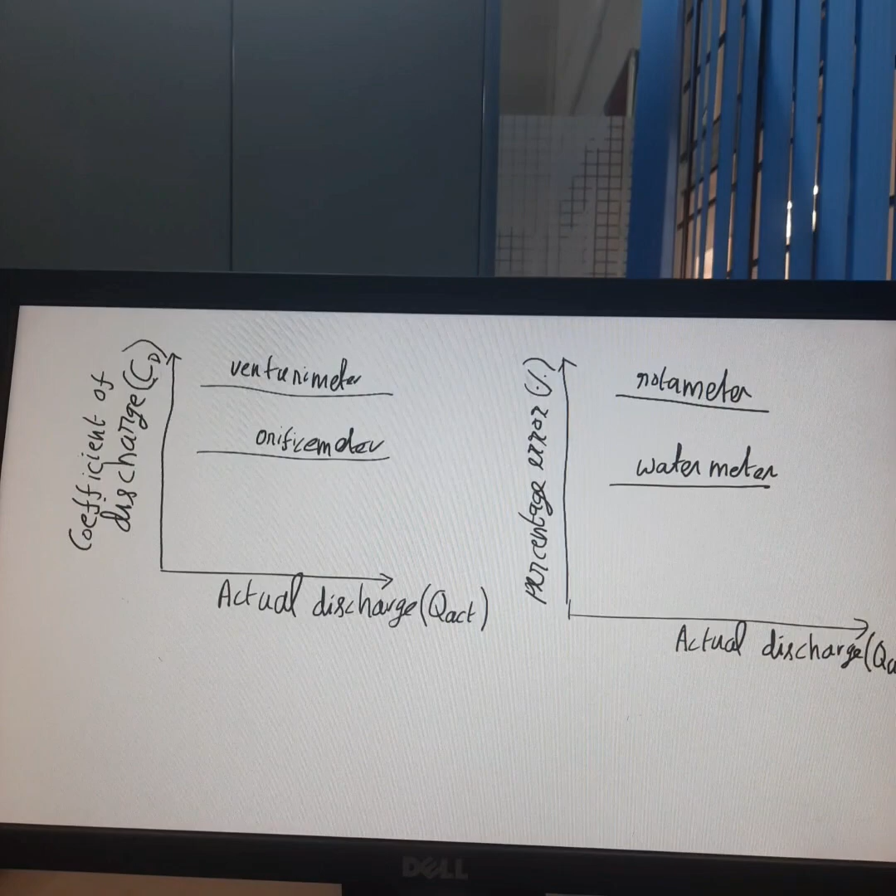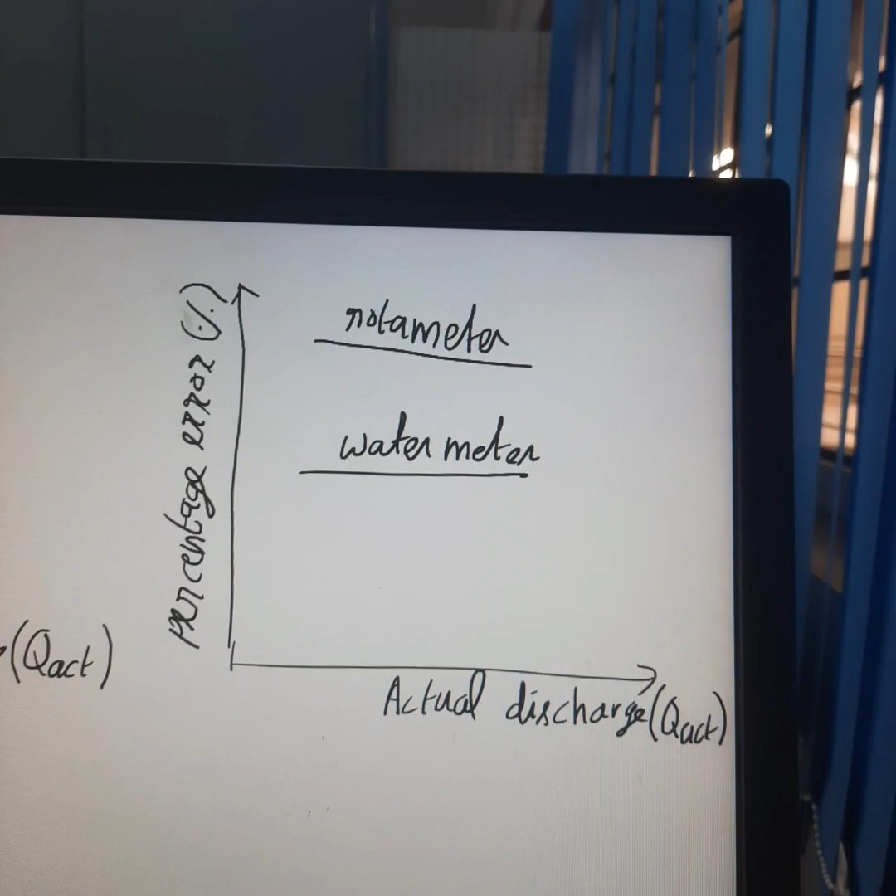Once the experimentation is completed, we can draw the graph. By changing the valve position, we can find the reading for different discharge levels. Then we can draw a graph between actual discharge and the CD value for the venturimeter and orifice meter, and for the water meter and rotameter we can draw another graph between actual discharge and percentage error.